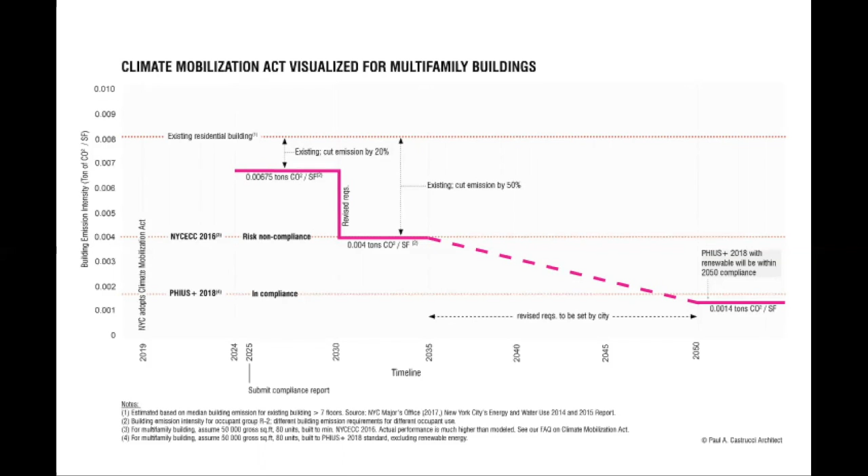What we find is that existing buildings on average don't meet Local Law 97 for 2024, and that when we build multifamily buildings to New York City Energy Conservation Code 2016, it's just at the target for 2030. So there is a risk of not meeting the 2030 emission caps. But when we look at projects being certified to Passive House standard, we see that it comes very, very close to hitting the 2050 goals set by the city. Now, in our simulation, we didn't add renewables. So when we add the renewables, Passive House buildings would be within the 2050 standards. So now Grayson will talk a little bit more on our projects.

Yeah, thanks, Ashok. I'm Grayson Jordan. I'm one of two principals for Paul Castrucci Architect. Before we get into the modular case studies, I just want to give a little background on our firm and historically how we've come to implement Passive House in our work, and specifically how we implement it in affordable housing and how that's leading us to these explorations of modular construction for affordable housing.

So the first project I'd like to look at is our first Passive House project, designed in 2009. It's the ABC No Rio Community Center. It's a 10,000 square foot arts and activist community center located in the Lower East Side. Our firm is a Lower East Side firm. We've been working in this community for 3 decades. And a lot of our work historically has been with local artist groups and local low-income cooperatives.

Working with this group, ABC No Rio, part of their design is they wanted the design to visually signify their values. One of those is environmental justice. So in addition to the green wall at the front facade, implementing Passive House was very much aligned with their values. ABC No Rio is a grassroots organization, and so they have not the deepest pockets. And so from our very first Passive House project, our firm has been very interested in developing details and constructible standards that can get us to Passive House on a budget.

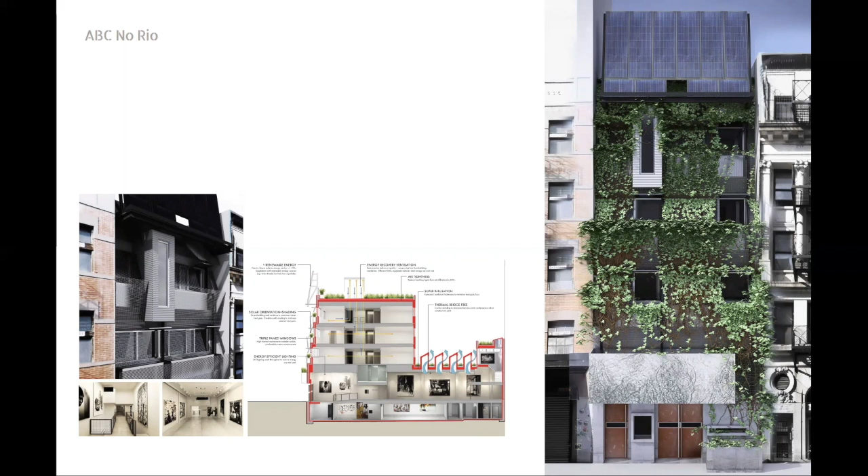And so we're really looking to leverage existing construction materials and construction techniques that are well known by local tradespeople, and also clearly communicating to the contractors, especially during the bid phase and pre-construction phase, to make sure that we're doing the best we can to deliver these ambitious energy goals within our budget.

Fast forward to 2014, we've been doing Passive House for about 5 years at this point. We're finding that some of our clients are value aligned with us and are looking to push for sustainability, but not everybody is. And so we're looking to create a demonstration project that shows Passive House makes sense for all projects. And so as an office, we developed a small project in Brooklyn called R951. This is a 3-family, 5,500 square foot building in Brooklyn, certified to the Passive House standard, completed in 2015.

It meets and exceeds Passive House standard, and then we have supplemented with rooftop solar PV to become, I think, the first building in New York City that's certified both Passive House and NYSERDA net zero capable. And so you'll see in some of our work, this is a big interest of ours, is using Passive House to push energy use way down, supplementing with solar to achieve net zero capable buildings.

And I think, again, successfully showing that Passive House can be economically implemented and can perform well on the open market. I'll turn it back to Ashok to talk a little bit about our deep energy retrofits for affordable housing.

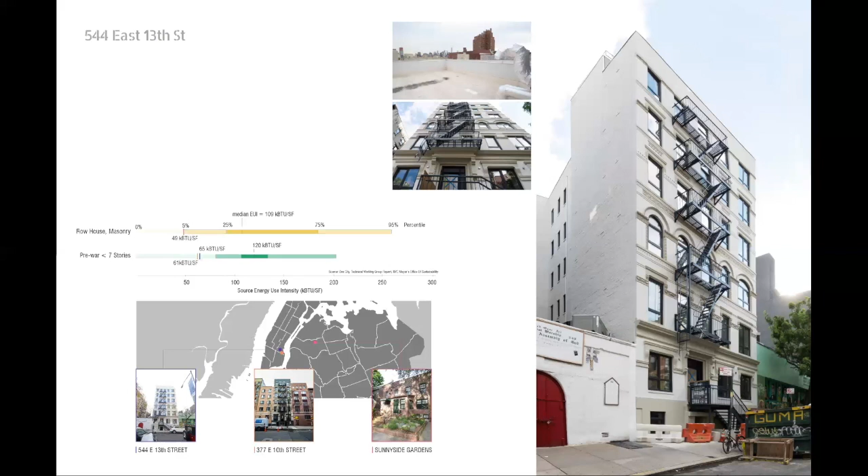The good news for us is that when we compare our benchmark energy data, which is shown in the graphic right above the map, to the city's report that's based on benchmark data submitted to the city, what we find is that the performance of all 3 retrofitted buildings are in the top 5% in terms of energy efficiency when comparing to existing buildings that are the same size and have the same occupancy.

So building on that work of smaller buildings and deep energy retrofits of existing affordable housing, our firm wanted to start to think about, as I think a lot of people are, addressing the larger affordable housing crisis. And we understand that this needs to be done on multiple fronts. So of course we want to continue with the deep energy retrofits. It's a really big piece of the puzzle, maybe the biggest piece. But we also want to contribute on the larger new construction affordable housing.

And we also recognize that some of the leaders in implementing Passive House in the city have been our colleagues designing affordable housing. So we started to seek new construction affordable housing projects that are a bit larger in scale. And so here you can see 4 larger buildings, 2 in Manhattan, 1 in the Bronx, 1 in Far Rockaway, Queens, that are beginning to get a little bigger but still implementing Passive House standards.

So on the left, you'll see earlier design. Top is a schematic design project in Harlem, a design development stage project in Manhattan. On the right, we're a bit further along. Bottom right is an affordable housing project in Far Rockaway, Queens, which is in construction documents. And on top is an affordable senior housing building in the Bronx that is under construction now.

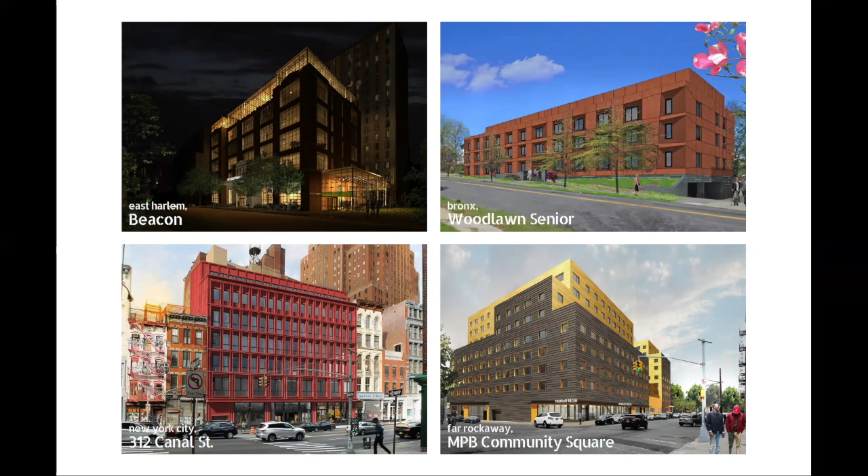And we're seeing between 80 units and 200 units in these buildings, being between 55,000 square feet and 200,000 square feet, and housing senior housing, general affordable housing, and supportive housing. And through these projects, we're really starting to develop a strong approach to sustainability and affordable housing.

And since we spend most of our time indoors, we take extreme care to use up-to-date standards to design for a healthier indoor environment by providing adequate ventilation, designing homes that will also cause fewer illnesses. We select materials carefully so they do not off-gas, and we also use THERM extensively to ensure minimal condensation risk.

Affordable housing construction in New York City is really a pretty well-defined process. It's typically going to be block and plank construction. And there are a lot of people doing really good work within this typology, especially implementing passive house in New York City. But there are limitations.

Specifically, there are budget limitations, primarily driven by labor cost, especially in senior housing, which, as many people may know, is driven by prevailing wage rates, which increases construction costs by up to 60 or 70%. You're also, for the most part, married to this construction typology. Most affordable housing is done this way.

And as we begin to contemplate how do we get to true carbon neutrality, we need to start thinking about whether buildings that are primarily made of CMU and concrete plank are really the best system to get there. As with any construction typology, there are also planning and layout rules of the roads that will affect our layouts and our maximum height and what we can do with our setbacks.

And finally, there's always an issue of quality control, which gets exacerbated the bigger you get. So we have really a pretty robust quality control process. We're doing mock-ups, kickoff training sessions with contractors. Passive house itself requires lots of inspections and observations. We work with really good teams of sustainability consultants to help us with that.

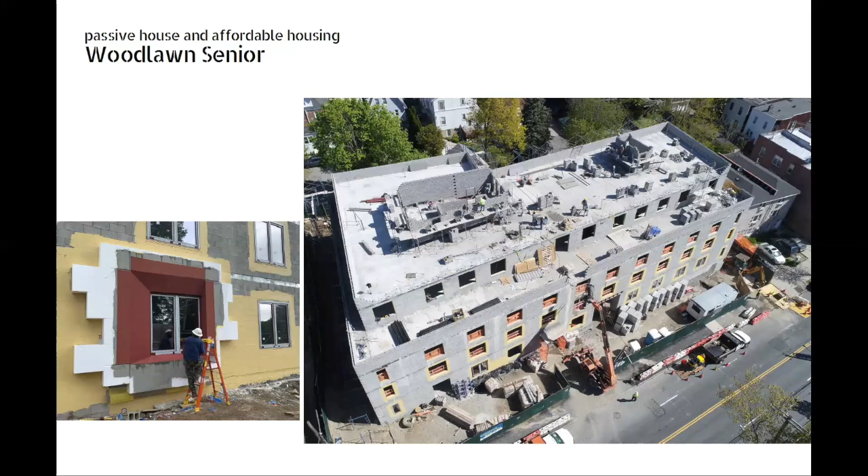But the reality is you're not going to see every window that's installed. You're not going to see every detail that's installed. So whereas the first mock-up might be excellently installed by the best crew, do the 50th through the 100th windows get installed by the same crew? Are they done on a cold, windy day so some corners are cut? And we're always looking for ways to make that process better, which brings us to modular construction.

Before we get into our case studies, just a word on what we mean by modular. Modular to us means it's a 3D object. We've got 4 walls, a floor, and a roof. Within that is completely finished space. So you'll have your kitchens and your bathrooms and all your finishes installed. Your windows will be installed. Depending on how you deliver the modular, perhaps the facade is installed or perhaps not. These mods, as we call them, are built in the factory completely, shipped to the site, and stacked up to make the building.

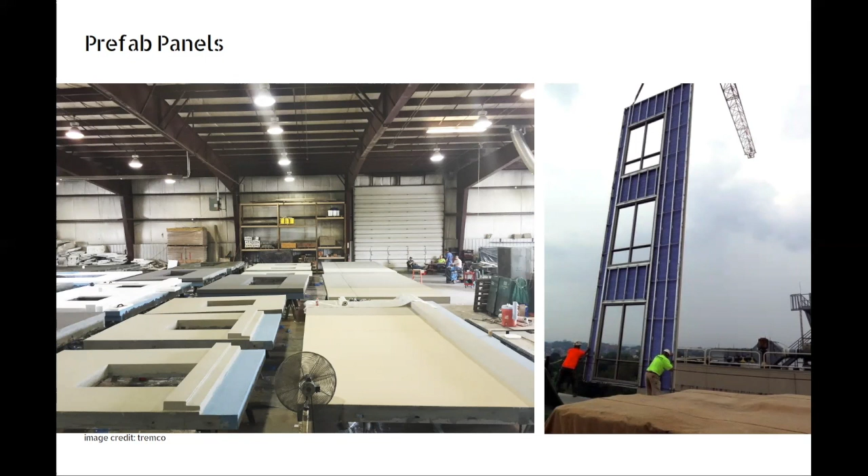This is a bit in contrast with prefab panels, also a factory produced product, but this is going to be more flat pack. So floors, roof, and most predominantly wall panels built in the factory and shipped to the site and tilted up. This is also a really great approach that we're looking at, especially for deep energy retrofits, the Energiesprong approach. And we're also actually looking at it in combination with modular. But for the purposes of today's discussion, we really are just talking about these 3-dimensional boxes or mods.

And what's pushing us here? 3 main reasons. We want to control cost, especially in senior housing. The ability to push labor offsite is beneficial. We want to reduce construction time. We're expecting these projects to be delivered on site in at least 25% less construction time, probably more. And we want to increase quality control.

With those benefits, there are design considerations that we have to manage. Those include the size of the mods and plans. You're going to be limited in your spans, usually much less than you would typically get, probably around 15 feet. The height of the mods, so that means both the total height that can be shipped, but also as you're stacking mods up, at each condition you have a thicker floor plate because you have the ceiling of the mod with the floor of the mod above it, which can be tough to meet the zoning requirements depending on the zoning district.

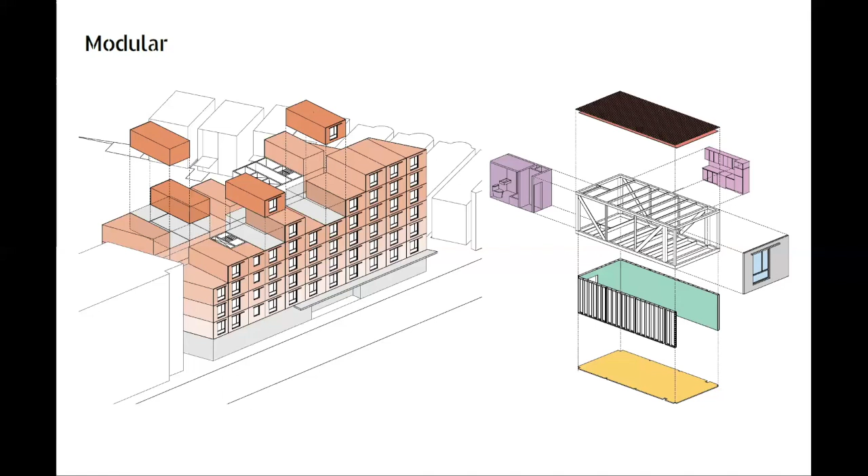We'll of course have to think about the transportation and stacking of the mods. The way that we implement MEP is going to be a bit different in modular construction, and with the more robust MEP approach of passive house, this takes another layer of consideration. And finally, we need to consider testing and inspections through a different lens for modular.

So our first case study is the Bethany Senior Terraces project. This is a 58-unit senior housing building located in Brooklyn, New York. We have just finished 100% construction documents for the project, so we're close to the point where we start construction. This is located in the East Flatbush neighborhood of Brooklyn. It's an R4 zoning lot, so it's not very dense for New York City. A lot of 1, 2, and 3 family buildings in the surrounding neighborhood.

The site itself formerly housed a 3.5-story institutional use. So the 3 to 4-story senior housing use we're putting back is actually quite closely matching it contextually. From a design perspective, we want to leverage the advantages of the site, so that lack of density and the ability to have bigger yards, and use that to help meet needs of the residents.

So with senior housing, we want to really encourage socialization in our common spaces and also encourage activity. And so that manifests itself in this project through this series of garden terraces on the south facade. Starting from the top floor where we have a community room, we're carving away that southern facade in a series of steps that sort of bring you from the top floor all the way down to the lobby.

And these are garden terraces, places for the residents to sit and socialize or garden, bring you through the common space of the lobby, and then back out at grade to this sort of generous southern garden to the south of the building, which is about 35 feet, and then terrace down to our cellar community space. And by pushing down these terraces, we create light and air into that cellar space and really create this sort of circuit of activity and socialization for the seniors.

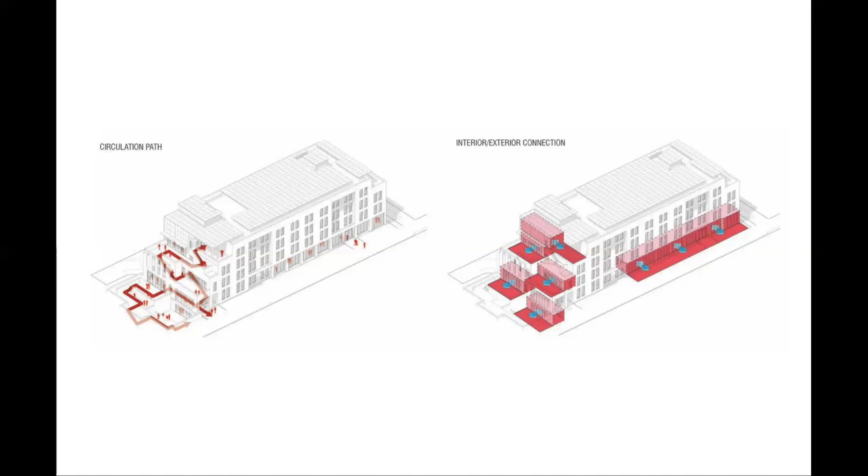This will be a Passive House certified building. We have a great client here who sort of demands that in the first instance, and we're building on that, pushing towards net zero by driving down the energy use with Passive House and then supplementing with a really robust solar PV array on the roof. We didn't quite hit the goal, but we got about 70% net zero capability here.

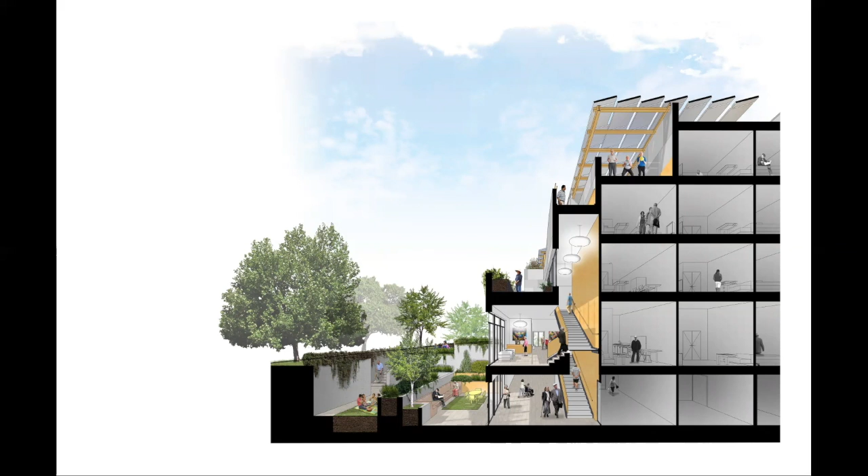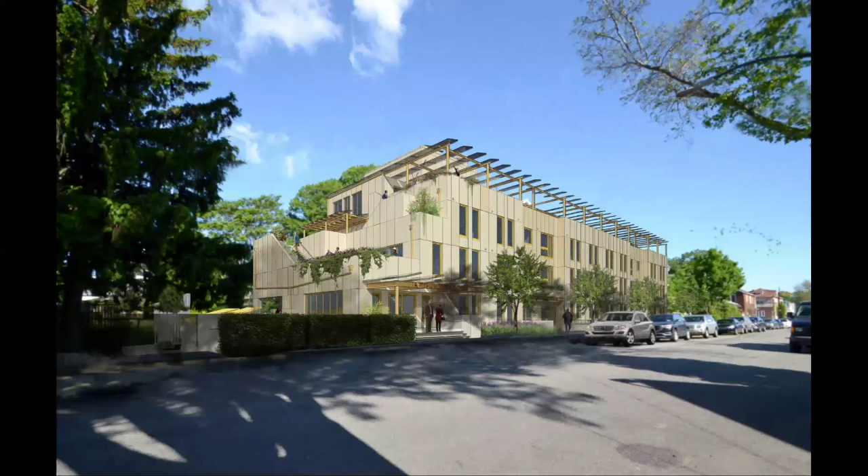Here you can see a section perspective through that sort of entry lobby way. At the bottom, you see our community room opening up on grade onto the garden, which we've pushed down to that cellar level, and then sort of gradually stepping up to our lobby, and then the monumental stairs in the lobby connecting us to these terraces as we move up the building with these garden terraces to the upper community room. Here's a rendering showing that sort of terracing effect along the south facade.

Okay, so looking specifically at modular, as with any design problem, it's not linear. We're not trying to solve one problem at a time. We're trying to solve all the problems sort of holistically and together. But one of the first things we really need to look at in modular is transportation and staging.

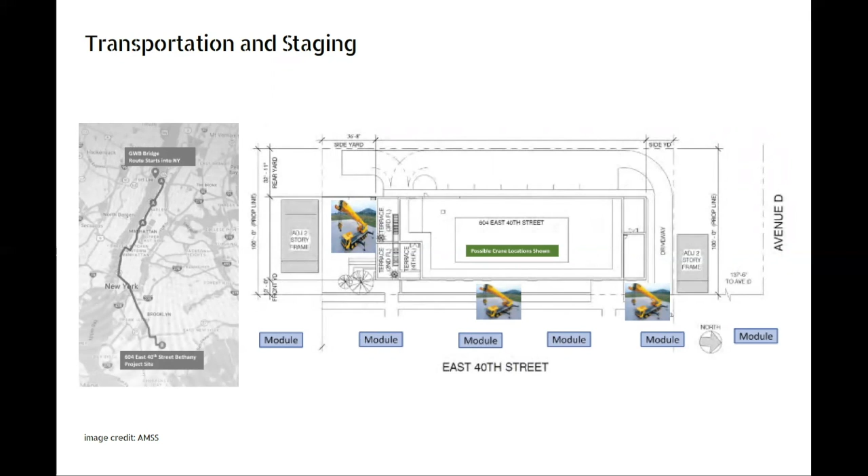So we need to understand the route that mods will take from the factory to the site, because there's going to be bridges and tunnels that will sort of dictate your pinch points and might change the size of your potential mods. And then at the site level, we need to look at where on the street can we stack the mods? How many mods can we stack for one day set? And where can we put things like the cranes? And this will dictate not only construction schedule and how many mods you can set a day, but again, may also dictate the overall size of the mod and influence the building planning.

So getting the ERVs into the apartments is beneficial for that. The other is there's actually some cost savings in this case, and this is something that makes senior housing particularly fruitful for modular. Some of you may know that senior housing in the city is prevailing wage labor, which drives up the cost, I would say about 60 to 70% over general affordable housing. And so moving some of that labor cost to offsite is beneficial.

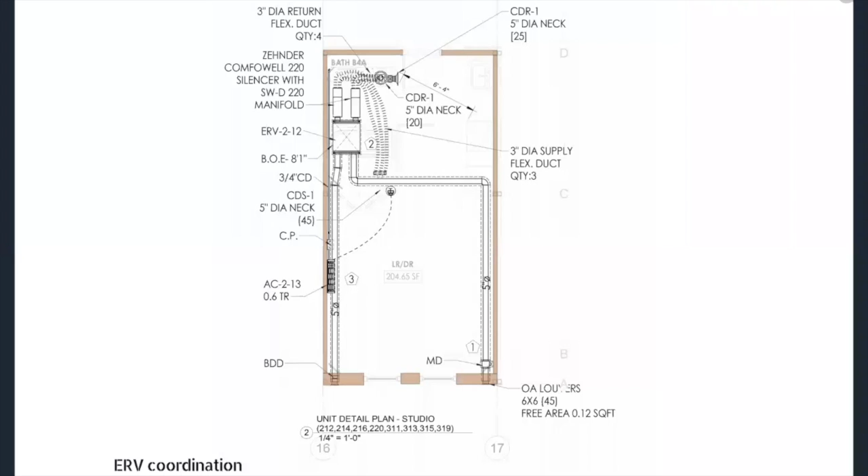This also affects how we're going to look at our bathrooms. So rather than back-to-back bathrooms, our bathrooms are going to sort of face the hallway. All of our stacks will be there. Looking specifically again at the ERV, you'll notice that this necessarily exhausts and intakes through the facade, which will have an aesthetic impact. You also need to carefully place your windows and your intakes and outtakes to make sure that you're keeping the clearances.

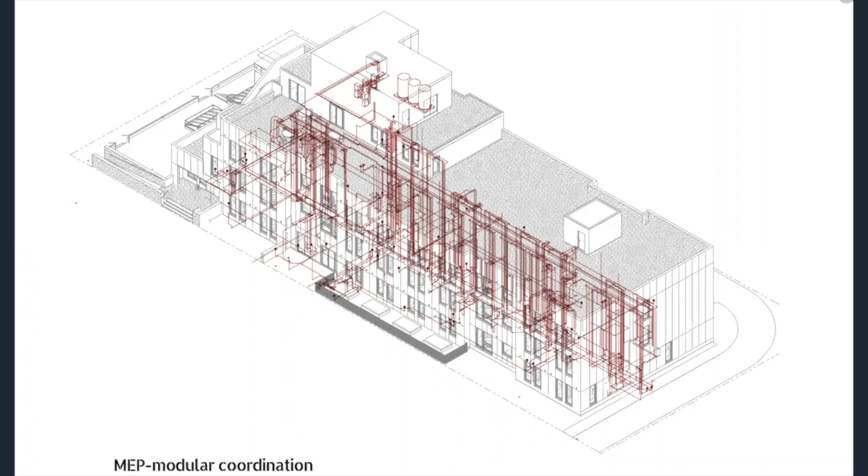And so the system will be comprised of 3 tanks, 1,200-gallon tanks in the thermal envelope connected to condensers on the roof. The condensers on the roof will heat up the water. Having that amount of storage helps us sort of move the load from peak to off-peak. And then we'll have a small amount of electric reheat if we need to get back up to the proper temperature. So just to wrap up this case study, looking at some of the wall sections and detailing issues for Passive House and modular.

Modular construction can come with the facade completely intact. In this case, we didn't go that way. Working with both the mod company and the GC, it made more sense here to build the mods to the sheathing, DensGlass sheathing, put on the air and water barrier, put in the windows, and then have the contractor come and scaffold the building and put an EIFS facade on.

The thinking there is, if you imagine stacking mods up on the site, no matter what, all 4 sides of that mod are going to have to be healed. So your air barrier, your insulation plane, your water barrier and your finish all need to be healed. And that's really important, obviously, in passive house. And so the contractor felt that by the time they put up all the scaffold and made all these small connections, it was actually more cost effective to just do the entire EIFS facade themselves.

2 other considerations at the wall detail level. First, if you look at the middle part of the section, you'll see a mod has a floor and a ceiling, and then the mod above it also has a floor. Block and plank is going to be an 8-inch block, 8-inch plank. That's your ceiling plane. This is going to be a foot for your floor plus 6 inches for the ceiling. So you're more than double what the floor plate is for a typical block and plank. And so that's a real consideration.

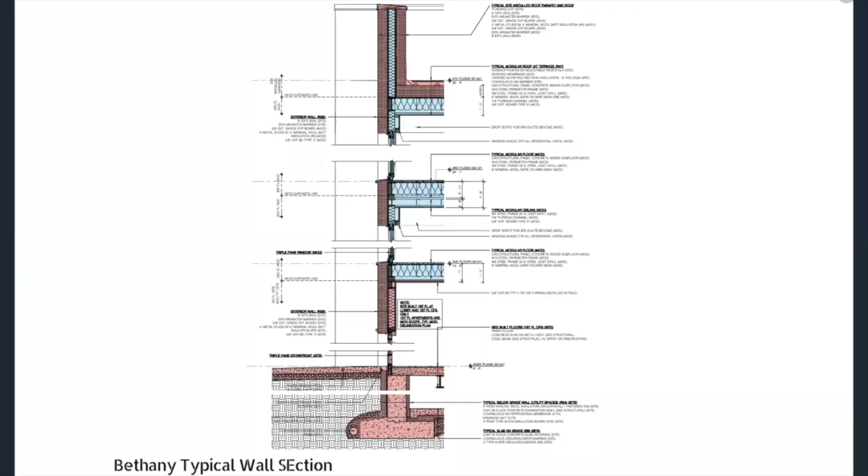Also note that mods, anything above 2-family, are going to be incombustible. So you're going to have a lot of steel. Essentially, a mod is a steel tube box. You have steel tube columns and W shapes that create, in this case, a 14-foot by 60 box, about 10 or 11 feet tall, infilled with metal studs. And as passive house practitioners, we know that this is not the best for thermal bridging. So compared to our block and plank building, there's a bit more exterior insulation required to overcome that.

This is a detail at our roof parapet and terrace setback. To note here, the parapets are built in the factory. They're like flat pack, structural steel or tubular steel rectangles infilled with metal studs and then bolted down to our mods. And that's a potentially very significant thermal bridge. So at that connection, there's an Armatherm thermal break. And we're using that same detail where we're connecting our solar trellis. So we want to make sure that we're planning for all these connections and thermally breaking them. Next slide, please.

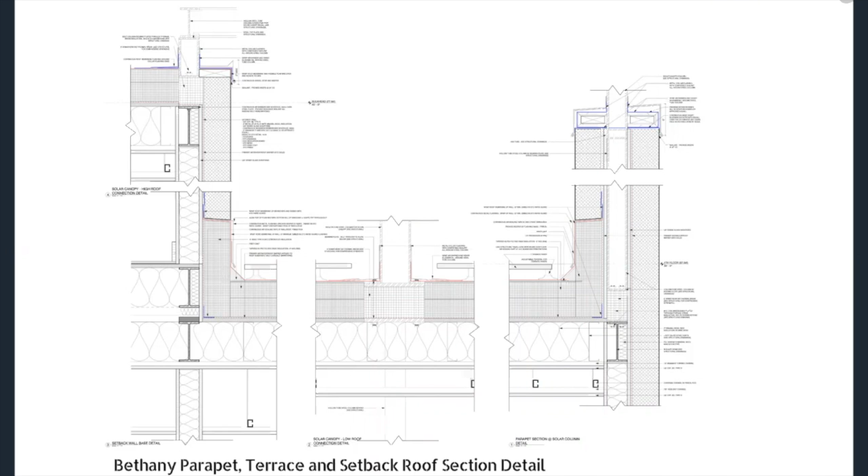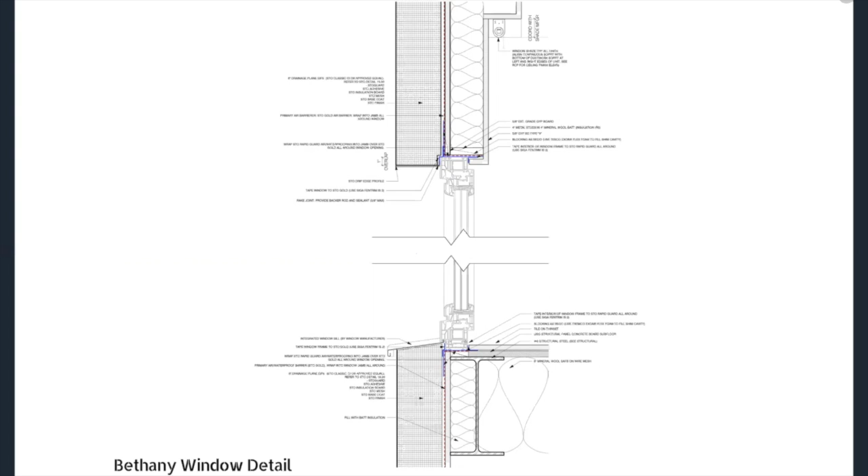And that's it for this part of the presentation. I'll turn it back now to Ashok to look at Habitat Net Zero.

Thank you, Grayson. The next project we're going to talk about is the NYCHA Next Generation Initiative called Habitat Net Zero. This is a project with Habitat for Humanity, NYCHA, and HPD. We're really excited about this project. The aim is to develop small vacant lots to build single-family homes. To give some context, the city has acquired many foreclosed homes and lots, and has been looking to develop these lots to address the acute housing crisis. Habitat Net Zero will also provide a pathway to home ownership, which is critical to addressing the affordable housing crisis and will help blunt against gentrification.

The project is on 13 sites, which are spread across Queens, New York. A significant outcome of this project is to create a methodology to deliver beautiful homes that are healthy, energy efficient, and at a price point that is affordable. So the project scalability, especially on a citywide basis, is a critical success metric for us.

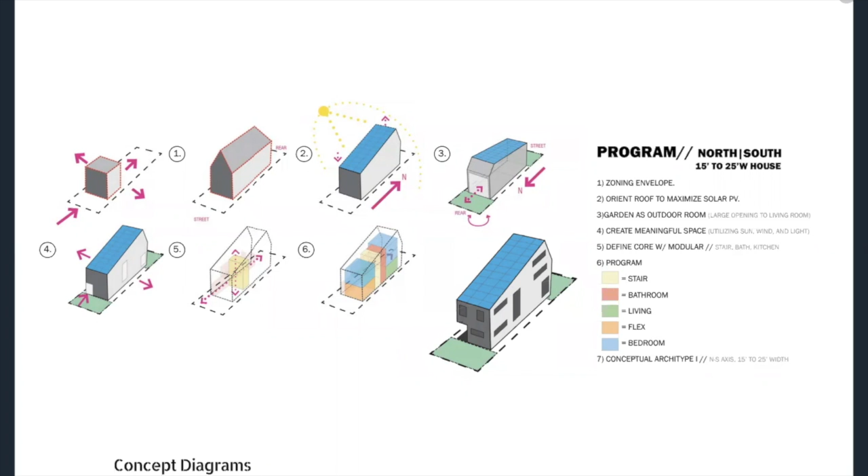We realize that each site has a unique topography, site orientation for solar gain, lot size and lot width, and very different zoning requirements. We also have existing homes in various conditions, some of which were more cost effective to rehab. So in the end, 10 of the 13 sites would be modular and 3 would be rehab projects. Based on the different conditions, we saw a prototype that will deliver a healthy, affordable house that will hit net zero energy while respecting the price range.

The budget also required us to absolutely go just to the essentials. So this project is nearly Passive House, but not Passive House certified. What we found was that when we go towards Passive House and add solar panels, it gives us a cost-effective net zero home.

We engaged very early with the GC for site build. We looked at panel manufacturers as well as talked to modular companies across the U.S. We generally found that the more the building is built in the factory, the lower the price per square foot.

Another factor that impacts the cost is transportation of the module, especially because these are smaller projects. In one instance, there was a large tree that made the transportation logistics a lot more complex, and it drove up the cost, and that helped choose that building to go for rehab. Our final hard cost is about $280 per square foot, and we are really happy with that.

So here we have prototype A. We eventually came up with 4 prototypes. This is based on site orientation, lot size, zoning regulation. Many of our prototypes from A, B, B2, and C have very similar concepts. So the 10 modular homes were treated as one single project for HPD. And so we were required to provide one UFAS unit. So this would be our accessible unit.

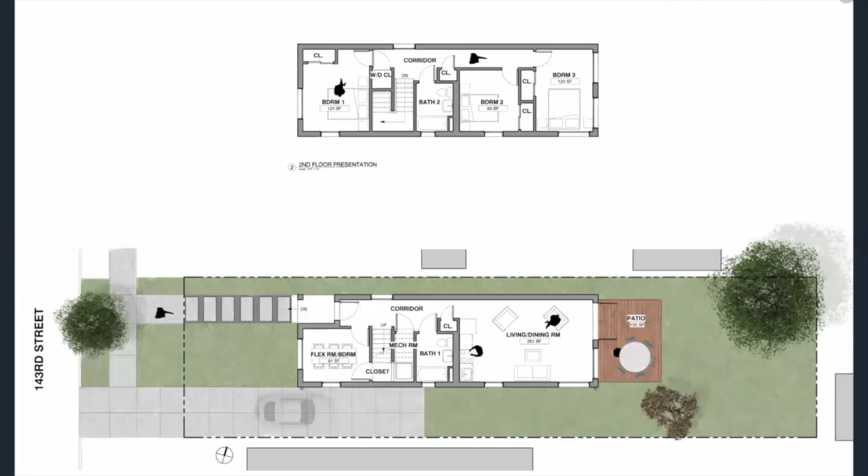Finally, we have a flex room that could be used for dining or den, but it also could be converted into a bedroom to allow for growing families and aging in place. And to help with the architectural design of the project, we added a solar parapet.

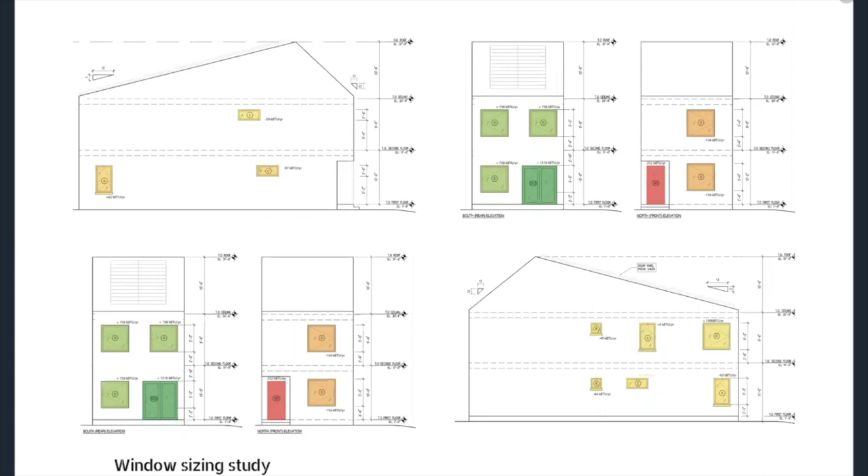We also use energy modeling extensively early in the design phase to help us optimize for site orientation, window-wall ratio, and window selection. So this is one of our studies where we were looking at the impact of where we're putting the windows, and that had a big impact on the final energy balance.

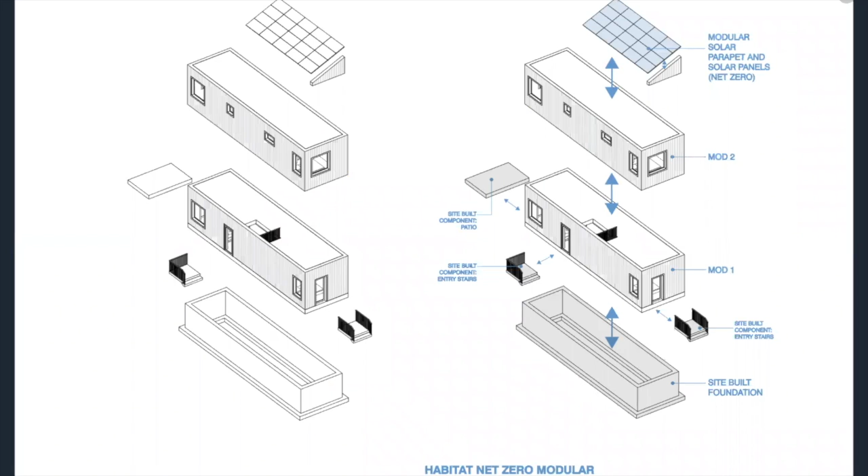Next slide, please. So here we demonstrate how the mods will come together on the site. So first, the GC scope would be the foundation. So the GC will build the foundation on site. Then the first mod will be craned in, and finally the second mod on top of that. The modular solar parapet and solar panels are then craned into place. Finally, there's the patio and the stairs, which also fall under the GC scope and are built on site.

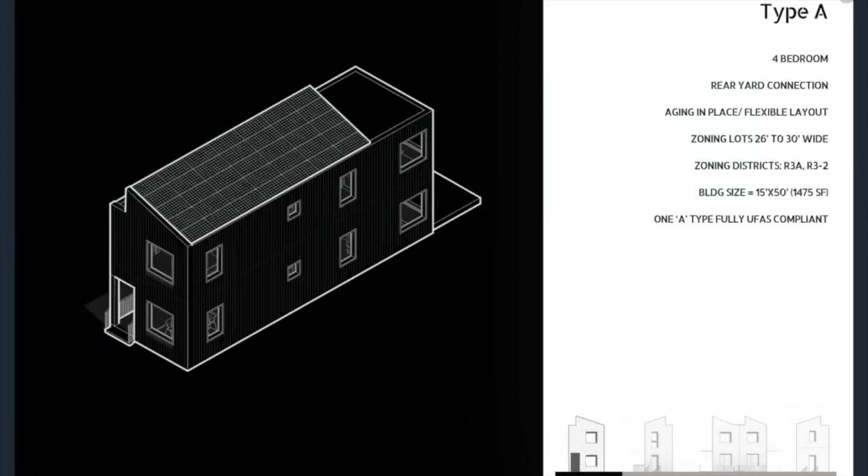So as I mentioned before, we came up with 4 final prototypes. This is type A. It's our first prototype. All of our prototypes have this living room in the rear and connection to the yard and aging in place. Prototype A is meant for lot width 26 feet to 30 feet, and the total area is 1,500 square feet. It has 4 bedrooms.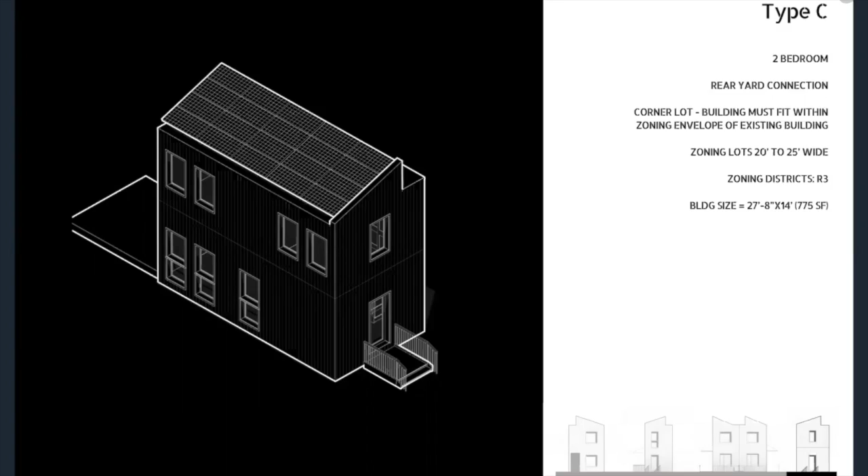So now I just want to go over some of the detailing for Habitat Net Zero. We went with a wood frame construction. The cladding and the exterior insulation here are factory installed. So if we look at the foundation, here's one of the points where we will get a thermal bridge. So how we address the thermal bridge between the foundation and the first mod is to use Armatherm all around as our thermal break. Next slide, please.

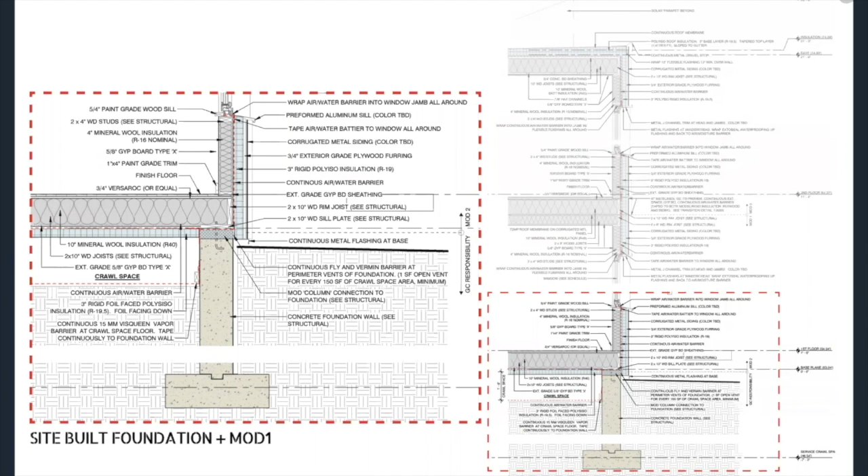We use triple pane glazed windows. Again, this detail is important because this is where the first and the second floor come together, and we see the mate line detail. We also have a double floor plate here between the first and second floor. So basically, how do we get the air barrier and continuous insulation?

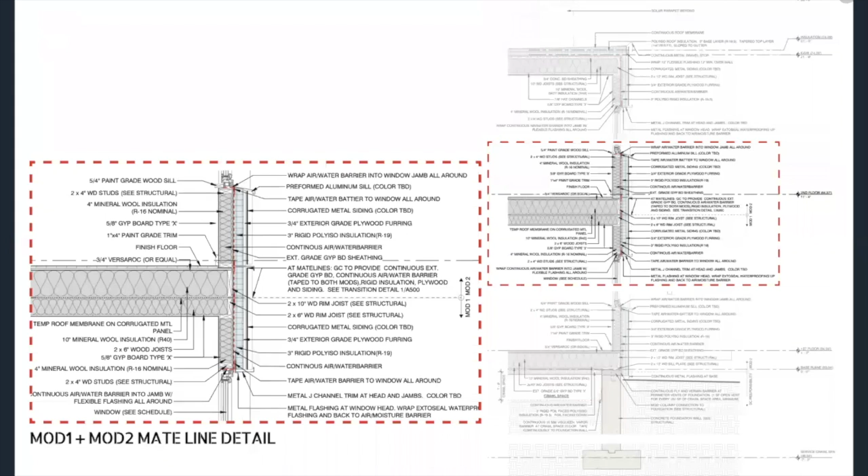So in the factory, about 1 foot around the mate line does not have insulation. So when the modules are on site and put together, the GC will then ensure the air barrier and the weather barrier are sealed and continuous, and then insert the insulation back. So this is the roof detail. What we see, we have about 3 inches of polyiso all around the building, except the roof has a little bit more insulation to get a higher R value.

And the roof is a pretty simple construction. It was mainly driven by cost. It's a flat roof, and the insulation and air barrier is continuous and it's factory installed, so there's no problem there. There is a solar parapet that gives sort of our design feature.

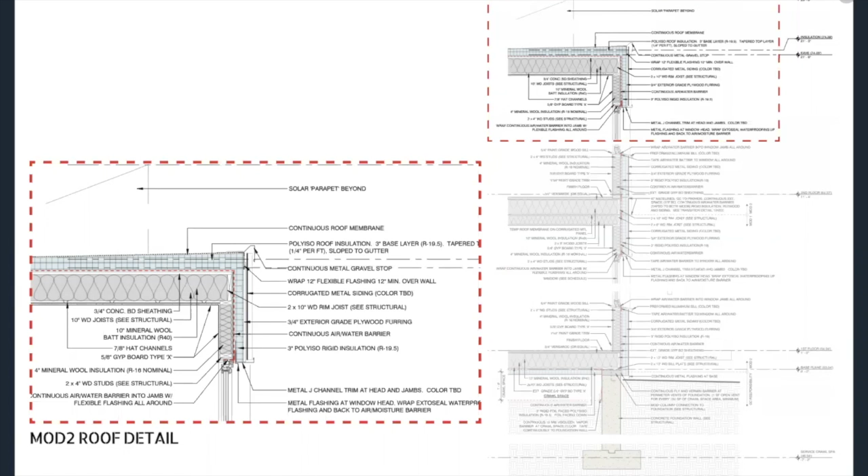So to summarize, here we have two connections. Basically, the first floor mod to the foundation, where we have the thermal break, and then first floor to the second floor, where we have the GC that could seal up the air barrier and weather barrier.

Great. Thanks, Ashok. I saw in the chat somebody was asking about this. So modular is going to be a little different in the approval and inspection process. And these two case studies are good because they demonstrate the two possible paths for approvals. So looking at Habitat, which Ashok just went through, smaller one and two family buildings, you apply at DOB the way that you would apply for any job. They look at zoning, they look at fireproofing, but the mods themselves are considered a product.

So the modular manufacturer takes the drawings of the mods, takes them to New York State, has them certified as a product, which is delivered to the site like a very expensive window, for example, or just a big complex product, let's say. So the inspection of that and the certification of that is all handled offsite.

For the larger projects, for most modular in New York City, again, you're applying at New York City, you're looking at zoning, you're looking at proximity to neighbors and fire protection and all those issues at the DOB level. But as you can imagine, a lot of the plumbing and sprinkler and fire protection is being built off-site. And so DOB is not sending inspectors out there to inspect that.

And so the way that works is a third-party inspector before approval takes responsibility for that. And these are inspectors certified by the city, by OTCR, and they will, during that process, inspect all the things that would normally be inspected on the site. So your sprinklers, your plumbing, etc.

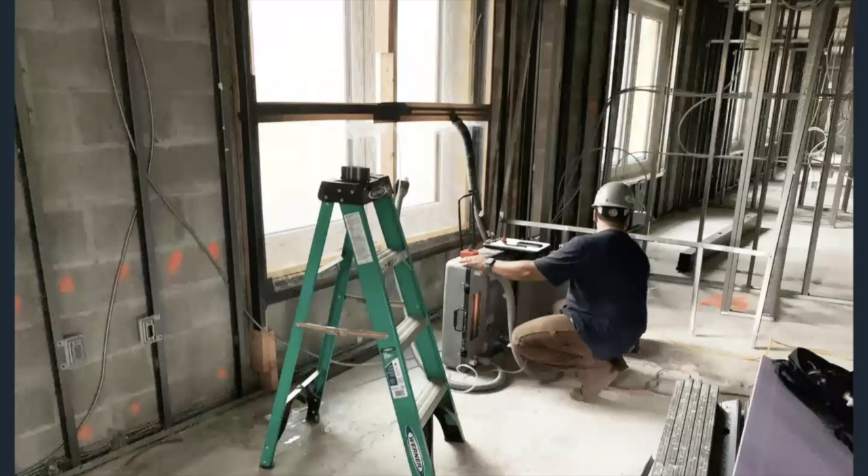But also when we're looking at Passive House, we have this other layer of quality control and verification. And again, that's being moved to the factory. And so the onus then is on the design team to set up the protocols of how those inspections go. And for both of these projects, which again are wrapping up construction documents, we have had the conversations of we really want to be doing all of our mock-ups in the earliest mods.

We want to be testing the earliest mods for airtightness and making sure that all the quality control checks are front-loaded. Just like with any building, you want to inspect the first window to make sure that they got it right. And if there's something wrong, you fix it, and that fix can permeate throughout the rest of the construction.

A reflection we're having in our firm is reducing the life cycle carbon emission. So what we find through research is that material selection and construction of the building accounts for about 20% of the building carbon emission. And when we calculate it for passive house, this percentage can be as high as 40%. So while we see a lot of research tackling operational costs of the building, there's really little literature on carbon emission from the actual construction process. And this proportion of carbon emission during construction is significant and shouldn't be ignored.

So we don't know if modular construction will be effective at reducing life cycle carbon emission, but we wanted to still present what we thought about it. So carbon emission from the construction process can be measured based on the transportation of materials, on-site equipment use, and on-site electricity use. In theory, quicker construction time reduces on-site equipment use and on-site electricity use. And in construction in New York especially, we use significant energy to condition the site, especially in the winter.

Similarly, the transportation of material can be reduced by improved logistics of the manufacturer buying in bulk, and this will also help reduce material waste. As a firm, as we're becoming more interested in understanding carbon footprints of these buildings, our next steps for both of these projects is to model them in EC3 against a base case. So for Bethany, that would be a block and plank building. But also, even though it's not permitted now, we're going to look at it if it were framed primarily in wood.

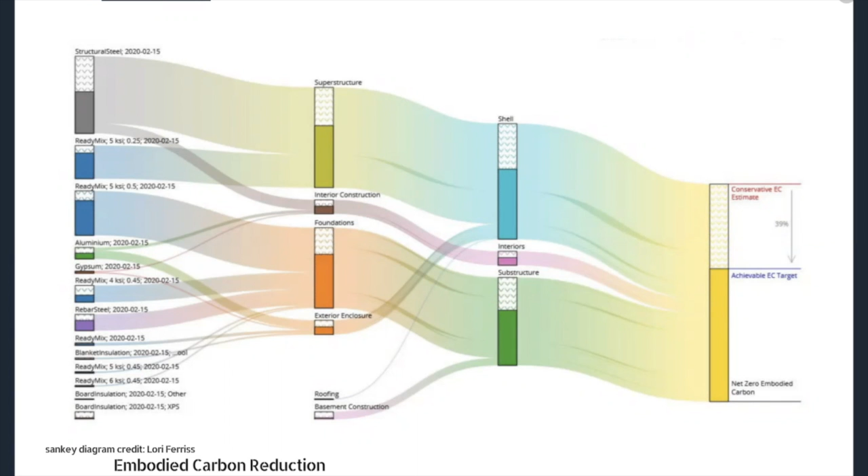Just to begin to have an understanding of what the ramifications of those design decisions are, and maybe move the conversation to a point where more of a wood frame building might have really positive carbon aspects, and just trying to figure out how do we make those buildings safely, but also deliver on a carbon neutral future.

So we would like to end this discussion on a few words on COVID-19. In the absence of the vaccine, the home becomes a very critical health infrastructure. And when the homes are not healthy, its inhabitants suffer. So as we move forward to a post-COVID-19 world, we need to address the structural causes of inequalities that have left millions of Americans out of the home. And the situation only grows more magnified in crowded conditions, especially in low-income multifamily buildings, where we saw higher rates

of exposure to COVID-19. What ASHRAE says is that improved ventilation through filtration or dilution of the air, and maintenance of water waste systems help mitigate spread of COVID-19. And we will probably see some code changes to make buildings more resilient to pandemic. Some of those possible changes would include adjusting occupancy limits of spaces, enhancing building HVAC operation, improving water quality management testing and practice, requiring touchless operators and controls, additional signage, and additional entrances and exits to buildings.

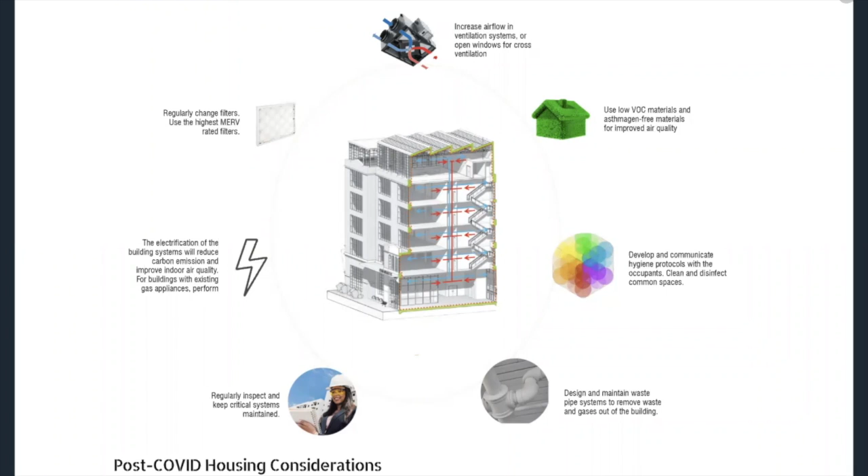You know, the passive house community are trendsetters, so it's good for designers to be conscious of these ways to make buildings more resilient and incorporate them in our design before the code.

There are a couple of questions regarding what kind of cladding you would recommend. Bethany is EIFS, which is foam, and we are looking to get away from foam. There again, you're always balancing a lot of different competing requirements, and at this point for that specific project, hitting the energy requirements at the cost points is what's driving that decision. And then for Habitat, it's a rain screen with corrugated metal siding and again polyiso foam insulation.

There are a couple of questions regarding which windows did you use. For Bethany, it's being decided, so I don't want to say. We're looking at a couple of companies. They are on the higher end because of the orientation, which is really long on the east and west. The windows have to be pretty good. On some of our other affordable housing projects, we're able to sometimes use not quite Passive House certified windows. But for this, these are high quality. I think it was 0.1 frames and 0.08 glass.

And Ashok, if you want to take the windows for Habitat. Sure. So for Habitat, we went with triple glazed windows as well. I think the U value was 0.18. We had a couple of bidders we were looking at. I think Zola was one of them. I can't quite remember which one had the lowest price. Yeah, we're looking at Zola and Yarrow, I think, for that one.